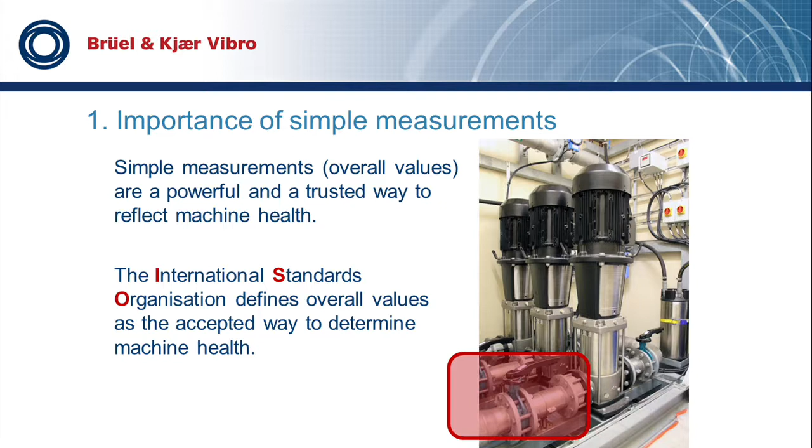However, this machine could have several different failures, like an unbalance of the electrical motor. We could have an unbalance of the pump due to several reasons, like thermal deformation or material caking or something like that. We could have a misalignment between motor and the pump. We could have electrical problems. And all these problems lead to vibrations.

And our overall now combines all the vibrations within a predefined frequency range, whether they are high or they are low, to one value. And this value gives us the possibility to evaluate the condition of the machine. Now, a very good question at this point could be to ask, who defines or who tells me what is a good value or what is a bad value?

And if you don't get any limit values, for example, from a manufacturer of a machine, or if you don't have any own experience in this case, then it is the best way to orient at national or international standards, like the ISO 10816. The ISO 10816 applies for the measurement type absolute bearing vibration and is the relevant measurement type for industrial machines with rolling element bearings.

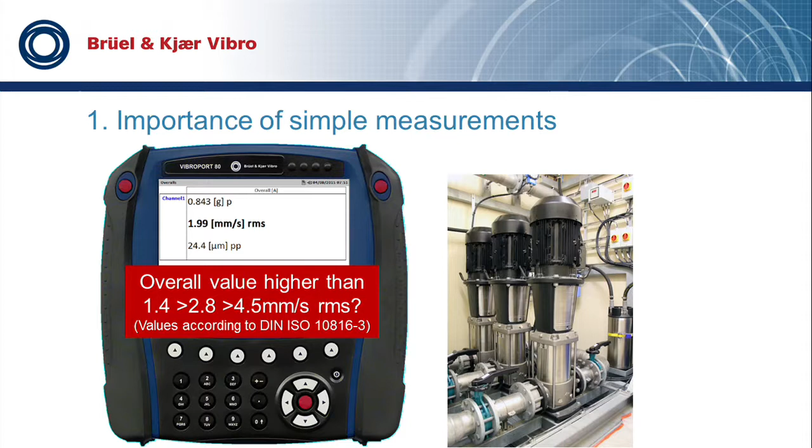We have the ISO 7919, which applies for relative shaft vibration, and that's the relevant measuring type for industrial machines with journal bearings.

Within this ISO 10816, we had so-called assessment zones. We had 4 assessment zones from A to D, and assessment zone A means vibrations for newly installed machines. Assessment zone B means vibrations for machines that can operate without a limit.

The zone C means vibrations for machines who can operate in a limited period of time. When you reach zone C, then you already have a defect at your machine, but it's not so dangerous that you have to stop it immediately. You can operate your machine for a limited period of time. But zone D is for machines where your vibrations are very dangerous and you have to stop your machine and do some maintenance.

We can here see an extract of the ISO 10816, and we see the values recommended from the ISO 10816, and you can see that everything that's below 1.4 millimeters per second is in zone A. Everything that's below 2.8 millimeters per second is in zone B, and so on. And when we compare it to our value, 1.99 millimeters per second, then we can see that according to the ISO 10816, the machine we have measured is in very good condition.

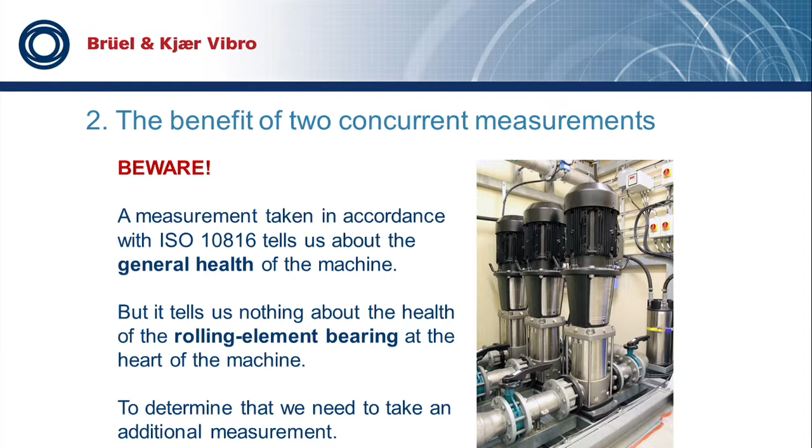However, we have to take care of something. As I told you before, the overall combines all vibration elements of our machine, including a defect bearing. But the problem is that the amplitudes that a defective bearing sends out are very, very low, and they have no influence on our overall. So if we just measure our standard overall according to ISO 10816, then it could be that we believe that our machine is in good condition while our bearing is close to damage. So we have to find another way to have a closer look at the condition of our bearing itself.

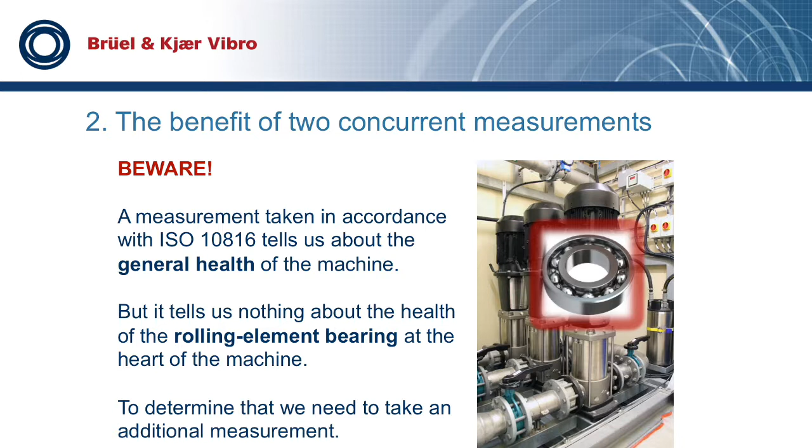We will do a second measurement at the same time with the same sensor, and that's the benefit we get from the VIBROTEST 80 or the VIBROPORT 80, that we are able to do two measurements simultaneously. We will choose path A of the instrument and measure our standard overall according to the ISO 10816, and on path B we choose another overall, a special overall, just to monitor the condition of our rolling element bearing.

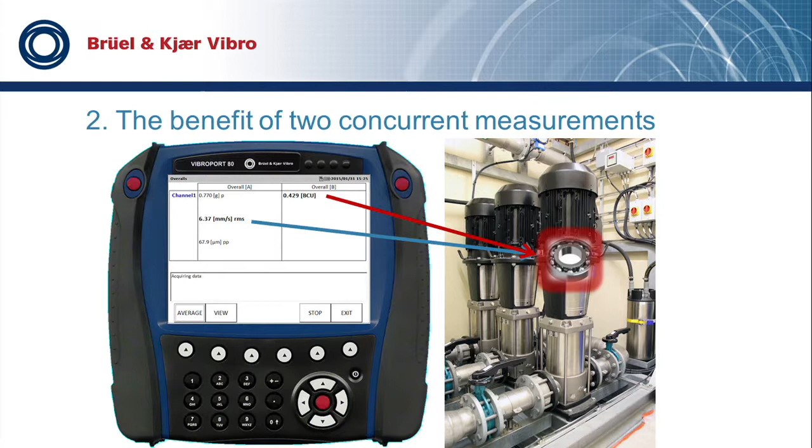Here we have the display of our instrument, and you can see that on the left side we have the overall for the machine, and on the right side we have a special overall just for our rolling element bearing. Here in this slide we can see the difference between both measurements. On the left side we can see the measurement according to ISO 10816, and the ISO 10816 recommends to measure the vibration velocity, the RMS value of the vibration velocity. And the RMS value of the vibration velocity represents the power of the vibration, with which power the machine is vibrating. And we are measuring it in a predefined frequency range from 10 Hz up to 1 kHz.

And we have to beware of something. This is just a recommendation. 10 Hz means that this recommendation applies for machines with a speed greater than 600 cycles per minute. 600 cycles per minute correspond with 10 Hz. So if you have machines rotating slower than 600 cycles per minute, you have to adjust this frequency range. This is very important.

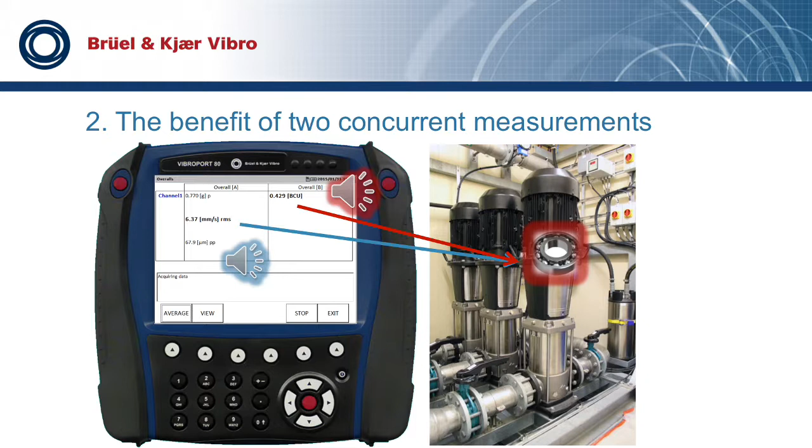The second one should represent the high frequency measurement. Unfortunately, the human ear is not able to hear frequencies above 15 kHz, so we had to do a little signal manipulation to give you the chance to hear what's going on in the bearing. I find this very impressive.

Okay, we will now come to point 3 of our agenda, and I will show you how easy it is to operate the instrument. Let's begin with pushing the start button of the instrument. Modern handheld devices like the VIBROPORT 80 and the VIBROTEST 80 are small little computers, so it always needs a little bit of time for the instrument to boot up.

According to our level concept, we are now on the top level of the VIBROTEST or VIBROPORT 80. You can see we have different kinds of icons here. We have blue icons, and the blue icons represent the measuring modules which are available for the instrument. And they are, in special case, more or less highlighted, and that depends on what measurement module you have bought.

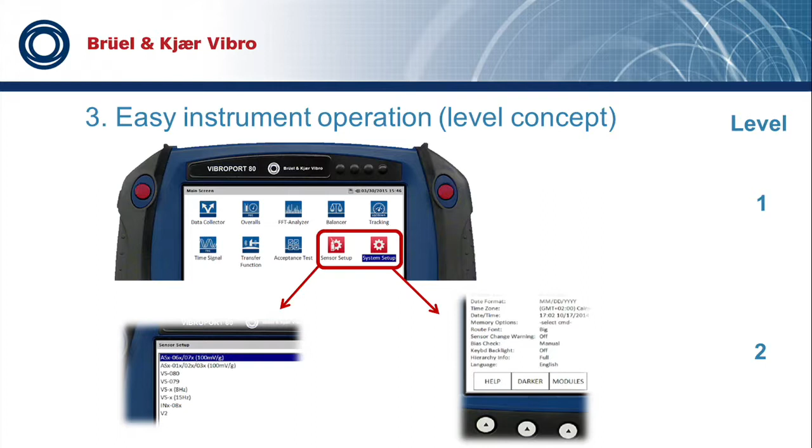We have the red icons, and these icons are special icons to set up the device in an optimal way along to the needs of the user. We had the system setup where we configure general parameters like date and time and several other things. And we have the sensor setup, which contains a library of all possible sensors or transducers which you can use with the instrument. I will explain these two buttons a little bit later.

Here we can see, as I told you before, the measurement modules, and it's possible to navigate with the navigation keys here to these different modules, and we can go into a module by pushing the so-called fire keys. We had 3 red fire keys on the instrument, and they have all the same function. It's just for your convenience which fire key you will use, whether you are a left-hand worker or a right-hand worker. And now we can push the fire key, and then we go into a measuring module.

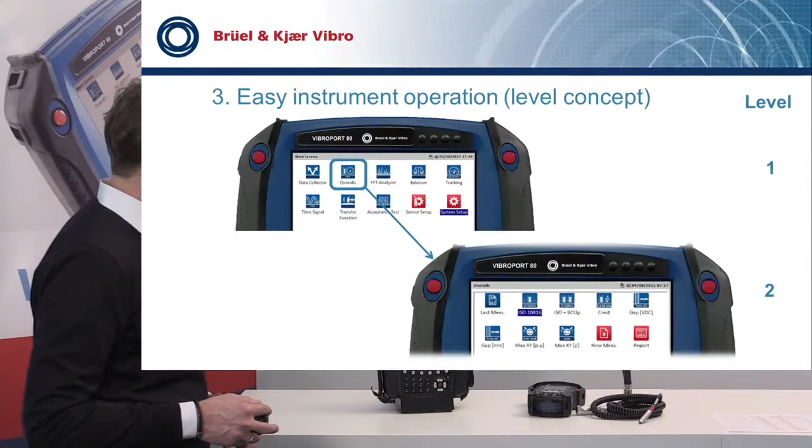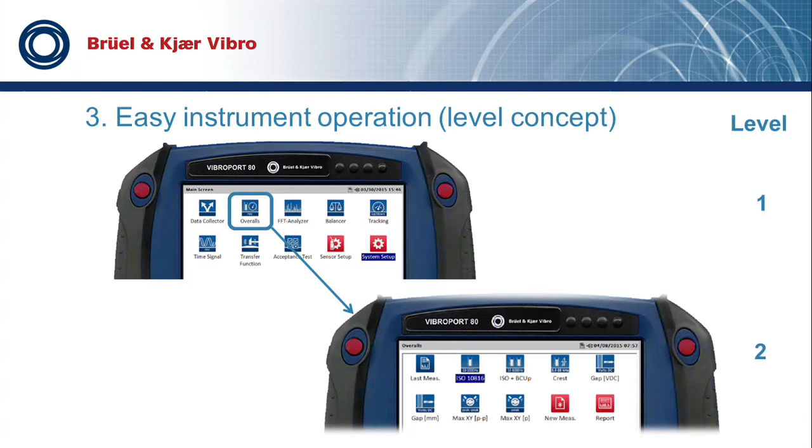And here we also have blue icons and red icons. And the blue icons represent predefined measurements. And you can choose one of these measurements, like a standard measurement according to the ISO 10816, and you can rely on the parameters that are pre-configured. And if you rely on them, you can push the start button and jump automatically into the measurement, and are now able to measure at your machine.

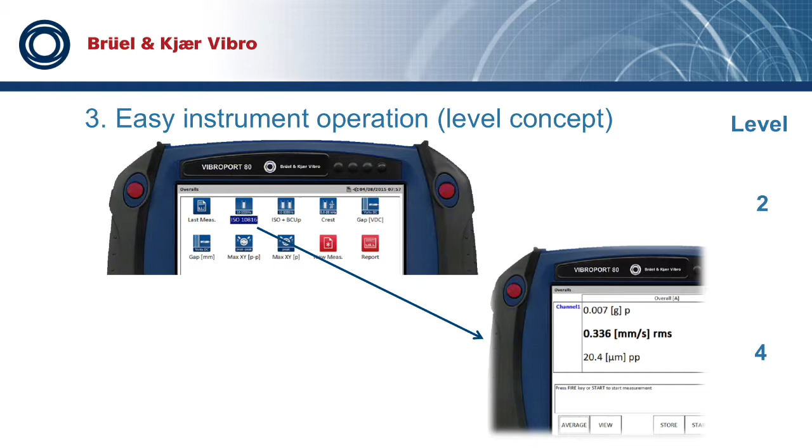But if you want to have a short look at the parameters behind that predefined measurement, you can push the fire key, and you can now have a look at the parameters and could probably change something if you wanted to. We go back. Even in this module we have 2 red buttons. We had a report button where stored measurements could be recalled, and we have the button New Measurement where we can create a new measurement from the beginning.

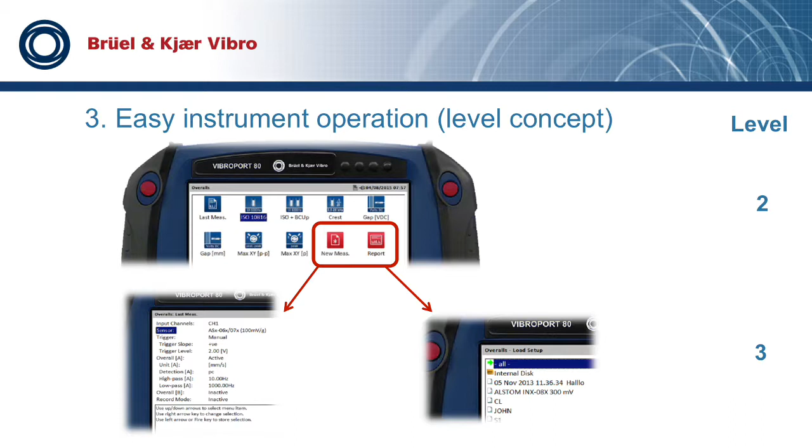According to our agenda, point 4, we will now do a live demonstration of all the things that I've told you now theoretically. For that we will do a little break and do a little rearrangement for you.

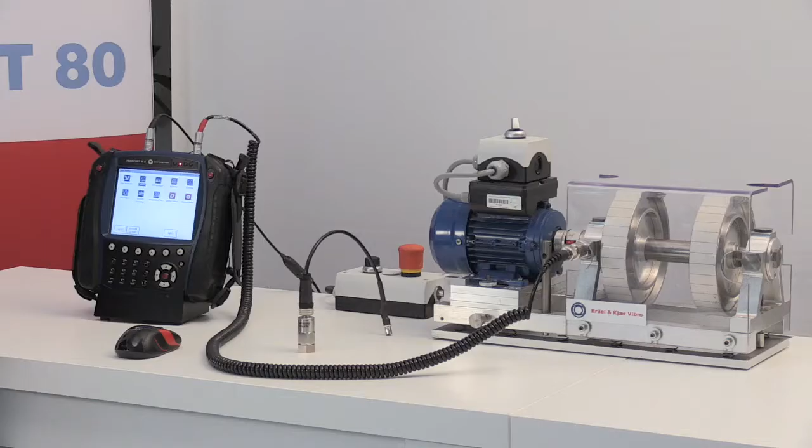Yeah, hello again. We will now come to the live demonstration, and for that we will go back from our industrial machine, our vertical pump set, and turn to a small little demonstration motor with 2 flywheels. And I will show you the measurements, the operation of the device at this small little motor. And it's necessary to explain something to you.

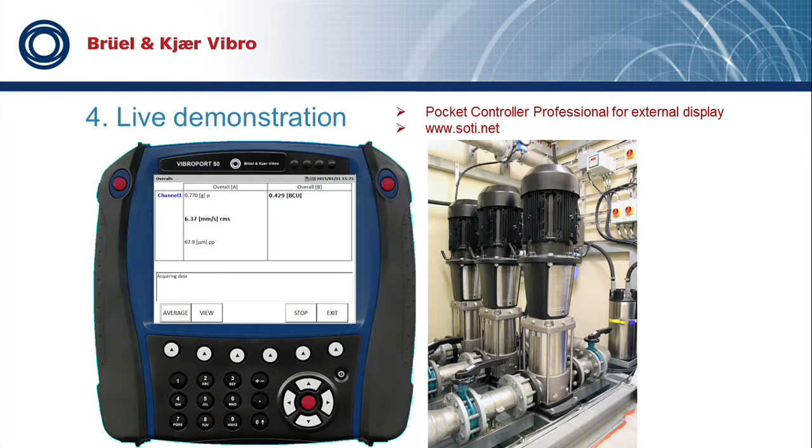I need a third-party software so I can show the display, the screen of my instrument to you. As I told you, it's a third-party software. It's called Pocket Controller Professional, and you can download it from the internet under www.soti.net. It doesn't cost much. I think it's less than $50. And this software enables you to project an image of your device on a computer screen.

And this could be very helpful, for example, for training sessions like we do here, or for the operation of the instrument via the internet. So it's possible that someone is sitting in an office, maybe in Germany, and the device is in China at a machine, and you can operate the device from your office in Germany via the internet. It's a very useful tool, I think. You connect your device with the computer, and then you can see the screen of our VIBROPORT 80 on your computer screen.

We want to talk about the overall module of this instrument, and we navigate with the navigation keys to our overall module, and we press the fire key. Then we enter this module. It also takes a little bit of time. And here we can see that we have blue icons once again, and we have red icons.

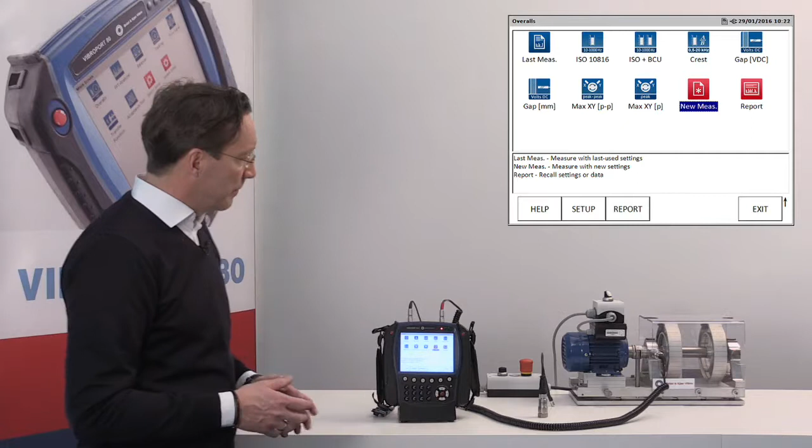The first red button is a new measurement. We will do a new measurement later, and I will show you all the parameters within this button. What's really helpful is that we have, as you can see here, predefined measurements. These are standard measurements within vibration measurement, and we have predefined the parameters within these measurements.

It's for people who aren't so familiar with these measurements, or who don't work with them every day. So they can come back to these predefined measurements, and they are sure that they do a meaningful measurement at this time.

But before we do a measurement, we will go back to the first level and explain to you the system setup. The system setup is necessary at that point when you get a new device or new instrument. Then you have to do the configuration. It's similar to a computer. When you get a new computer, you have to configure it. And it's the same here.

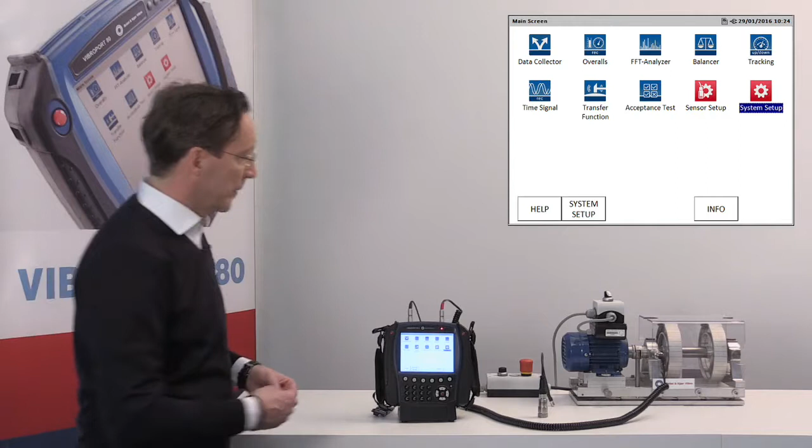I will press the fire key and go into this module, and we'll have a look at all the different parameters. First of all, we have the memory. We have an internal memory with approximately, I think, 50 megabyte capacity. So I always recommend my customers only to use the card. So we choose the card.

The next parameter is timeout. Here we can predefine a period of time after which the instrument automatically shuts down. So if you're not working for 10 or 15 minutes and the instrument realizes it, then it shuts down to save battery. I, for myself, don't like the timeout function, so I always put it on off.

Then we go to the units. In some countries we have the imperial units, for example in England or maybe in America, I'm not quite sure, but we're here in Germany, so we are using the metric system.

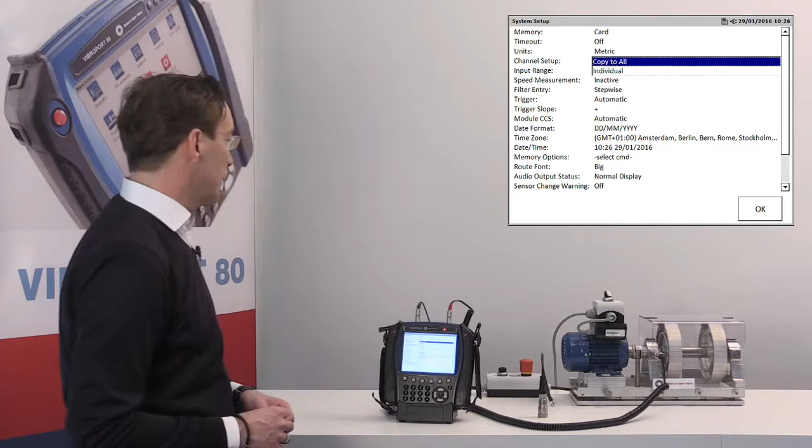We're coming to the channel setup. The channel setup has the possibility to choose copy to all. This is quite helpful when you are working with 2 or more sensors. Then you only have to configure one channel and the instrument copies it to all the other channels. So you don't have to configure each single sensor by yourself.

But there are applications where it's perhaps useful to do an individual configuration. For example, when you use low-cost sensors with outlying sensitivities, then to make sure you do a meaningful measurement, it's absolutely important to configure each sensor by itself. Then you have a look at the calibration sheet and you get the sensitivity of each sensor, and then you are able to configure each sensor separately. But we put it on copy to all; that makes life easier for us.

Input range. We have the possibility of auto range, maximum, and sensor units. And most of the time we don't know anything about the range of the incoming signal. So it's always the best way to choose automatically. Then you're on the safe side. There could be applications like tool spindles, where you have very, very low amplitudes in a very small range. Then you could use the sensor units and give them a fixed range by yourself. But most of the time we use auto range.

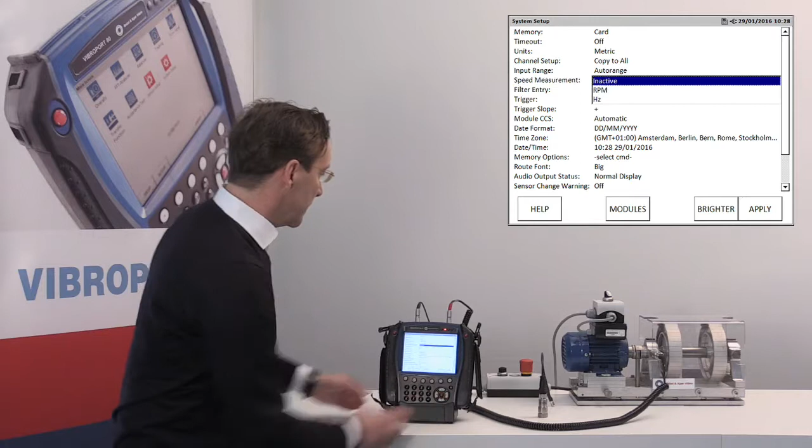Then we're coming to the speed measurement. It's possible to enable a speed measurement or disable it. For most of the measurement modules like the overall or the spectrum, it's not necessary to measure a speed. The problem is, if you enable the speed measurement, then the device wants to have a speed. You have to fix a speed sensor, you have to fix a reflection mark. Otherwise, if the instrument doesn't get a speed signal, it will do nothing.

So bear this in mind. If you are on site doing a measurement and you only see stars on your display, then it could be that you enabled the speed measurement but didn't give it a speed signal. So for our application today, we don't need a speed measurement, and for that we set it inactive.

Filter entry, we can choose between stepwise and free. Here I recommend always to use stepwise. That means that in measuring modules where you can choose the frequency range, you get the most popular frequency bands, and you can choose from these bands. Free would mean that you can define your own frequency range by hand, saying, okay, I want to measure from 7 Hertz to 389 Hertz. But in 15 years in my vibration life here at Brüel & Kjær Vibro, I've never met someone doing that. So we leave it on stepwise.

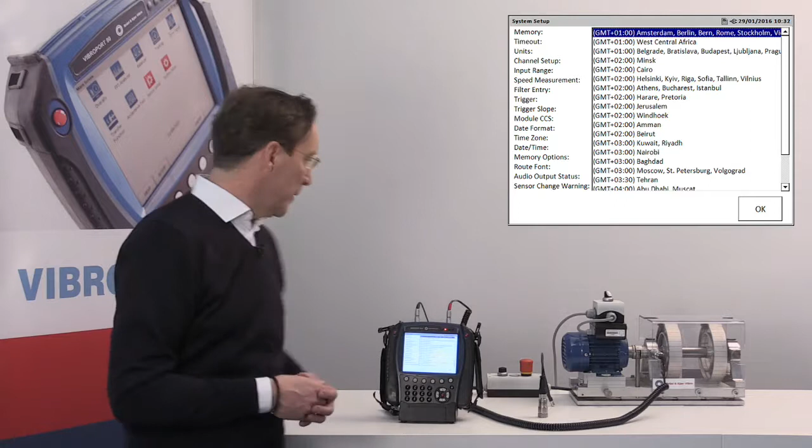We have a date. Coming to the date, we have different formats for the date. We're here in Germany and we appreciate to have day and month and year. So I choose day and month and year. We can choose a time zone. We can tell the device I'm now in America or in China or in Europe. We're in Germany today, so I choose as time zone Berlin.

And then we go to date and time, and here is the mask where we can set the actual date and the time. We can change it, so when we store measurements, we always have the right time and the right date for that. Oops, that's wrong. We are having 10. Okay. Everything's all right.

The next parameters, memory options, route font, and sensor change warning are related to route-based data collection, and they are not relevant in this training session, so we'll explain them in another training course.

Last thing is language. We have the most popular languages around the world. We're here in Germany, so I have to talk in English. No, I would even prefer to talk in German, but then most of our customers couldn't understand me, so I try to go along with English.

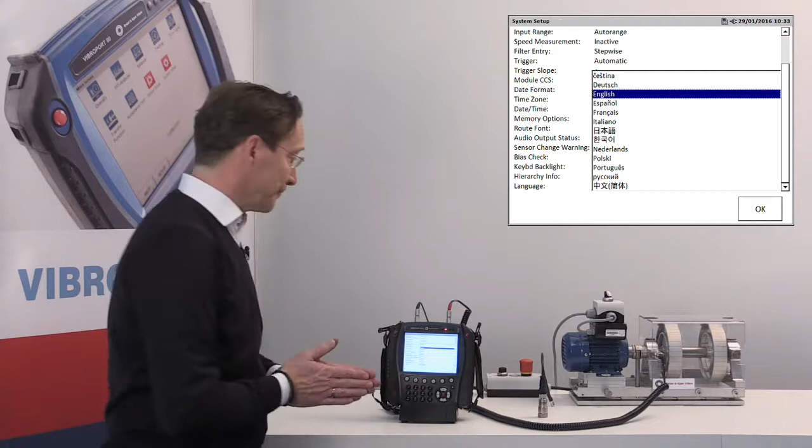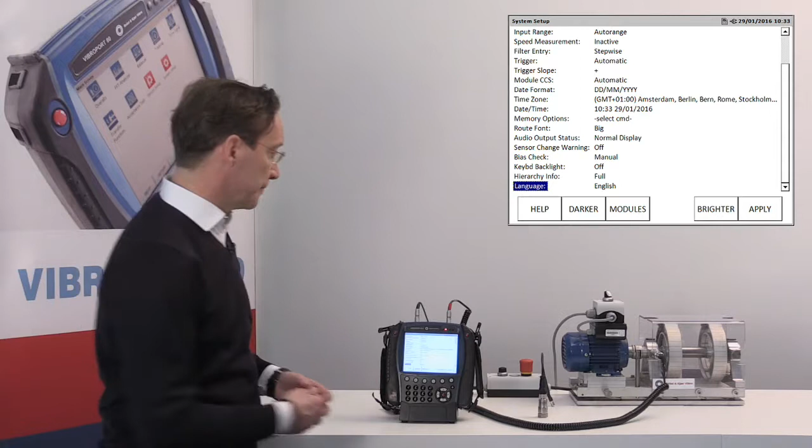So, that's it for the system setup. We configure now all the parameters, and normally we don't have to go into the system setup every day. We do this once, and then it applies for all the modules we use. Okay, we press the apply button, and now everything is fixed.

Let's have a short look at the sensor setup. As I already told you, we have a library of the sensors from Brüel & Kjær Vibro, which we can use with this VIBROPORT 80. I press the fire key and go into this module. And here you can see that we have the classic standard sensors from our program.

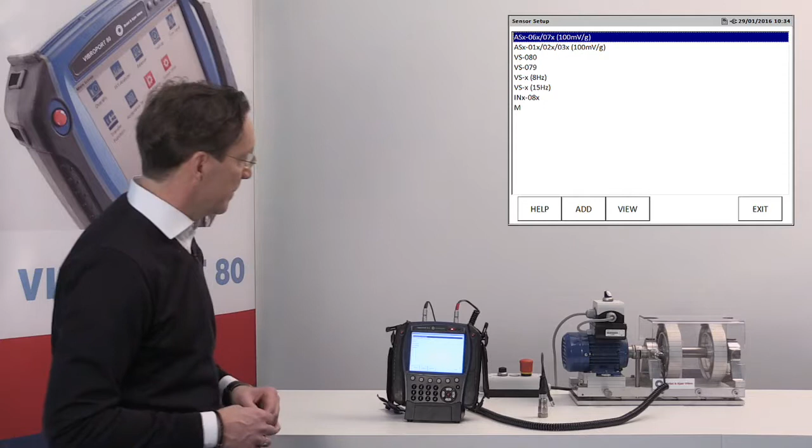As you perhaps already know, we have 3 types of measurements within vibration measurement. We have the vibration velocity, we have the vibration acceleration, and we have the displacement. And here we have the relevant sensors for these measurement types. AS always stands for acceleration sensors, VS stands for velocity, and the INx is a displacement sensor, so you can measure displacement when necessary. But it's very easy to add a new sensor if you would like to.

It could be that you want to use a third-party sensor, or you are a service technician, you come to a machine where you find a fixed installed safety system. Fixed installed safety systems sometimes have so-called buffered outputs, and at these buffered outputs you can tap the original sensor signal and can use it for your device. That's quite powerful. And for that you have to know the technical data of the sensor installed. And I will show you now how easy it is to add a new sensor.

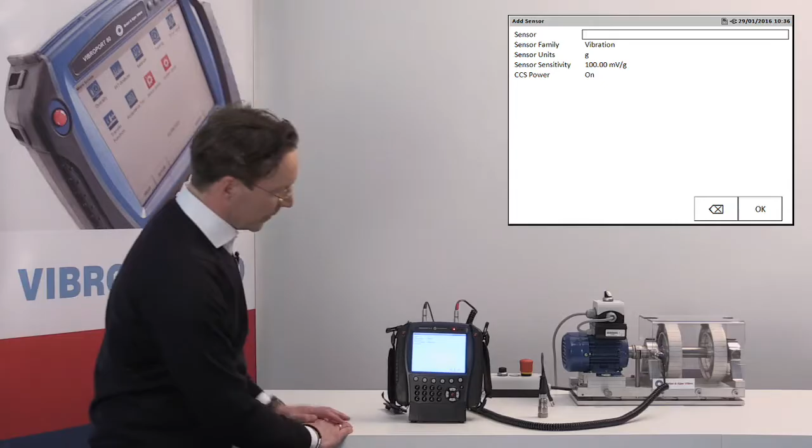We can here press the Add button. We have here the function keys. We press the Add button, and now it gives us this mask. And we have here sensor. We can give the sensor a name. We can have a look at the sensor, how it's called. We can give it just a name as we want. And I will give it the name, perhaps, H. Okay.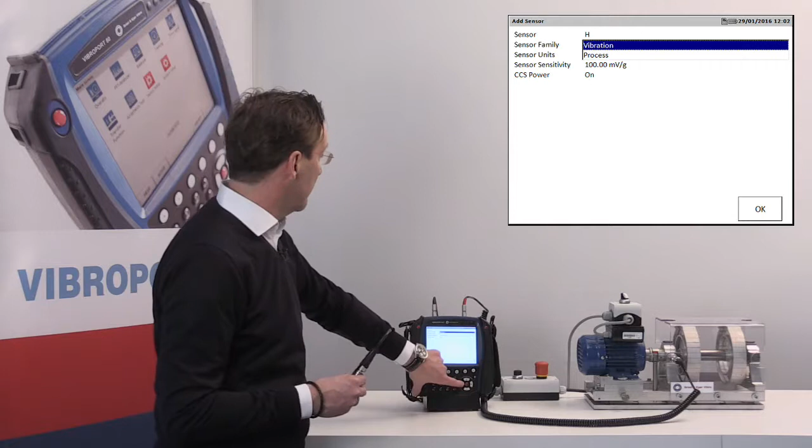What kind of sensor family do we have? It is a vibration sensor. It's also possible to enter process sensors like temperature or pressure or something like that. But we have a vibration sensor. We have a look at the unit, the sensor unit. We go into it, and we see that we have all the units known already. We have vibration acceleration, we have velocity, and we have displacement, and so we have the relevant units for that. This is an acceleration sensor, so we choose the unit G.

To enter the sensitivity, it's necessary to have a look at the data sheet. You can look at the data sheet with the technical information for the sensor, and there you can see the sensitivity of the sensor. And this is a sensor with a sensitivity of 99.8 millivolt per G. And we enter 99.8.

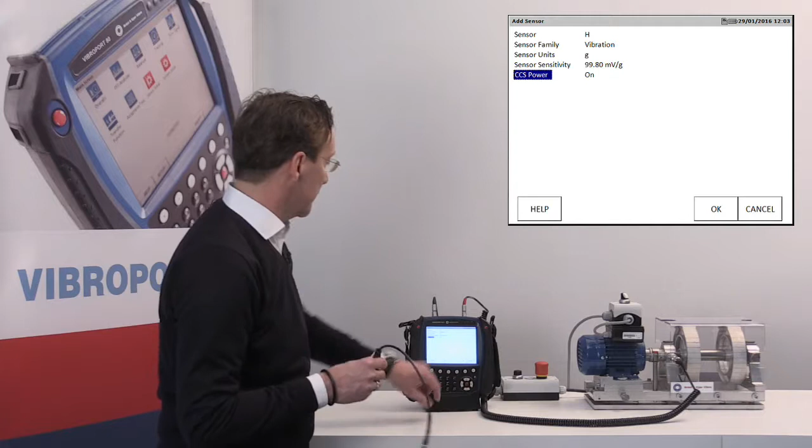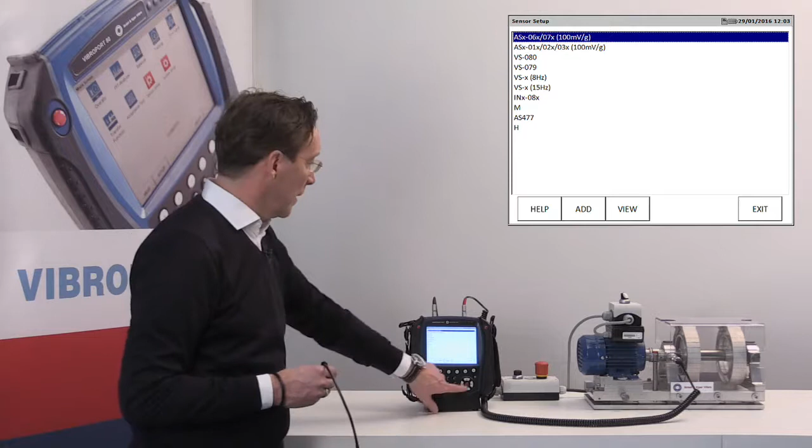And this is a special sensor which needs a power supply, a constant current power supply. So we had to put it on here. Okay, so everything's correct. We can press OK. And now this new sensor is part of our library, and we can use it for measurements in the future. We press exit, and we are now ready with what my colleague once called the housekeeping of our device.

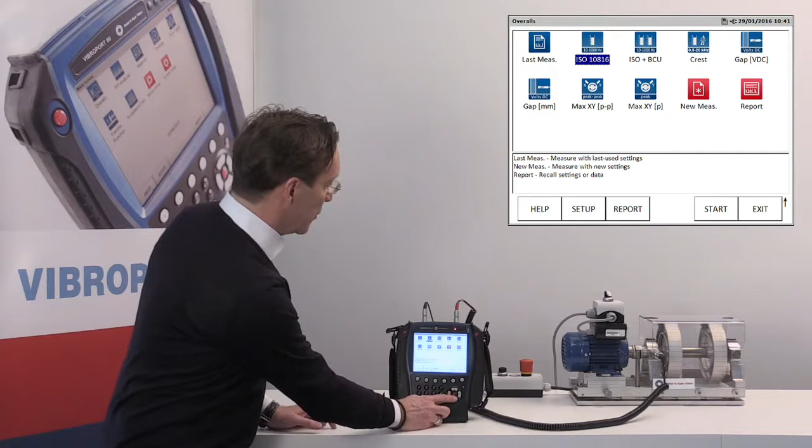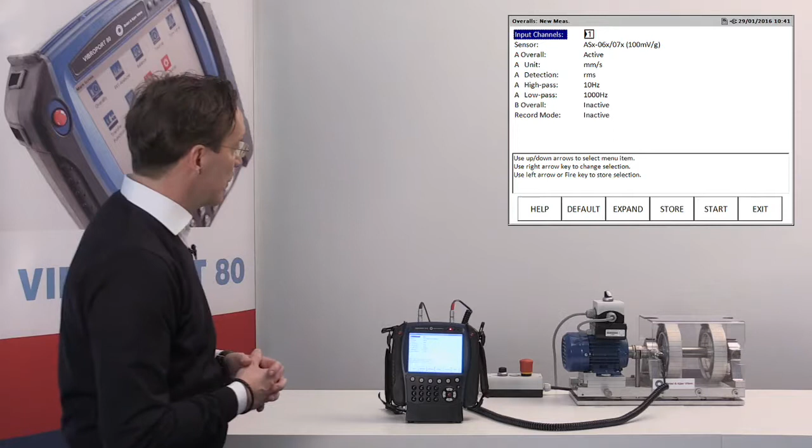Okay, let's come to the next point. We will now do a live demonstration of the module overalls. I navigate to the overall and press the fire key, and we want to do a completely new measurement from the start. So I choose the button New Measurement and press the fire key. Here are now all parameters we have to configure. First of all, we have the input channels. We can measure with 1, 2, 3, or 4 channels. It depends on the application. Most of the time it's enough to measure with 1 channel.

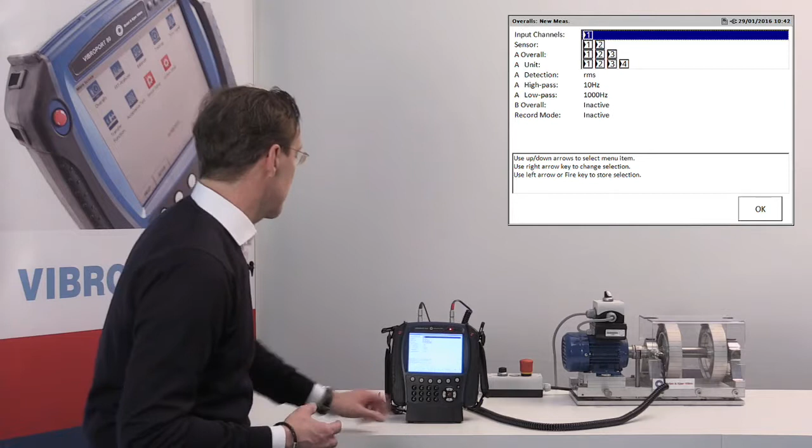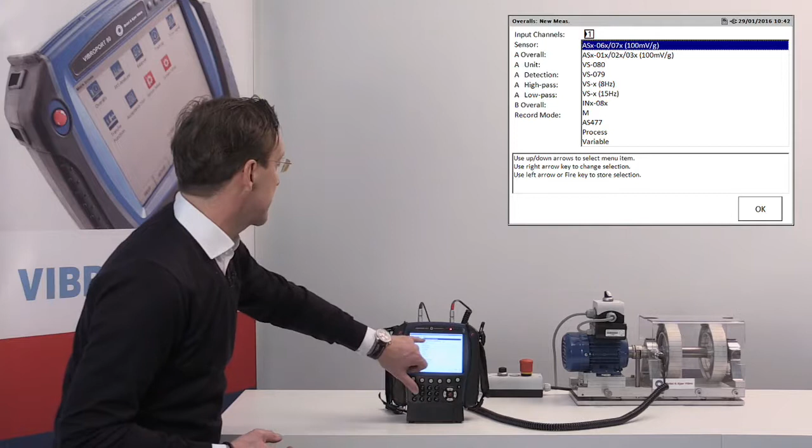Then we choose a sensor. Here we can see all the sensors which are available in this instrument. We are measuring with a standard sensor, an AS063. So I select this one, an AS06X. We have a family of sensors with AS6, so we have the X there to put them all in one family. We will set the path A on active. That's necessary, otherwise we couldn't measure. The unit is millimeter per second. We are measuring the vibration velocity in accordance to the ISO 10816.

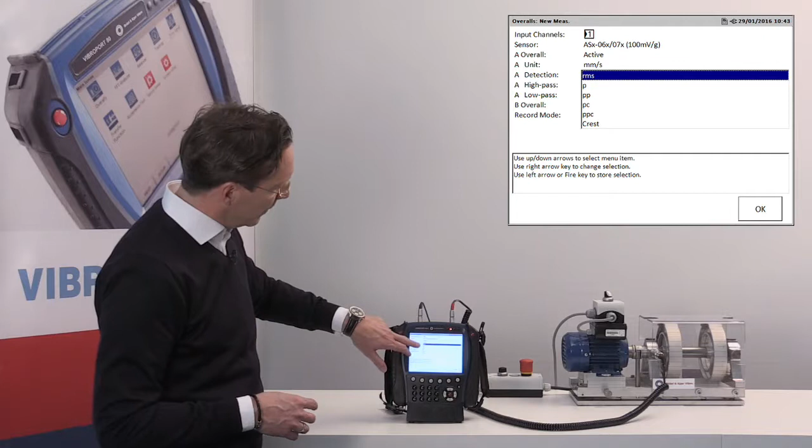And the detection is the RMS value. We have other detections like peak or peak to peak. This is a true peak or a true peak to peak. We could also detect the value with peak calculated. When choosing this, that means that we are measuring an RMS value and multiply it with √2. And when we choose peak to peak calculated, we are measuring an RMS value and multiply it with 2 times √2.

So please bear in mind that there are a lot of different things that you could select, and it's always absolutely important to bear this in mind, because when you try to compare measurements to each other, if you have a colleague or a customer who says, I've done a measurement on site and I have this value, and you do a measurement on site and you have a different value, then please compare the measurements and have a look at all these parameters if they are completely the same. So if there's something different here in this area, that could lead to problems and could lead to differences within the value.

Another interesting detection is the crest factor. The crest factor is a very easy and simple measurement for the early detection of bearing damages. You need one sensor, you choose crest factor. And what does the instrument do? The instrument measures the RMS value of the acceleration and the peak value of the acceleration, and it calculates the ratio of both. And you get a value, and if this value lies between 2.6 or 3.6, then you can be sure that your rolling element bearing is in very good condition. So it's a very easy measurement for you.

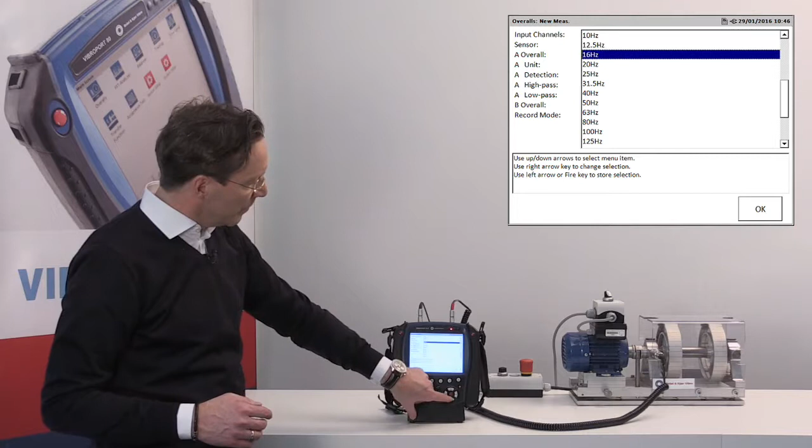Okay, we choose the RMS value, and now we're coming to the high pass. And now you can see what I've explained a little bit before. Here we can see the stepwise bands. We have several bands that we can choose, the most popular ones, and we choose 10 Hertz for the high pass. So everything below 10 Hertz we don't measure, and the low pass is at 1000 Hertz. So everything above 1000 Hertz we don't measure.

Okay, it's possible to choose the second path. We can put it on active, and now we have a second parameter list, like the parameter list for channel A, and we can here configure a second measurement. As I told you once before, with a normal standard overall, we can't see a damaged bearing, so we choose here as a unit our BCU value, so we can have a close look at our bearing and monitor with the second path the condition of it.

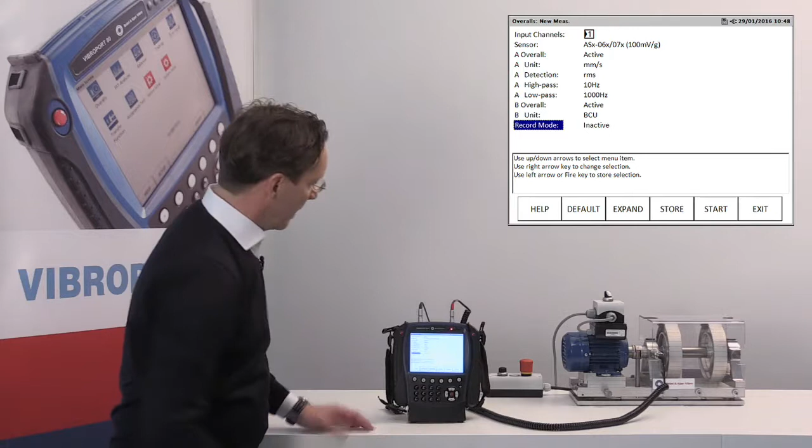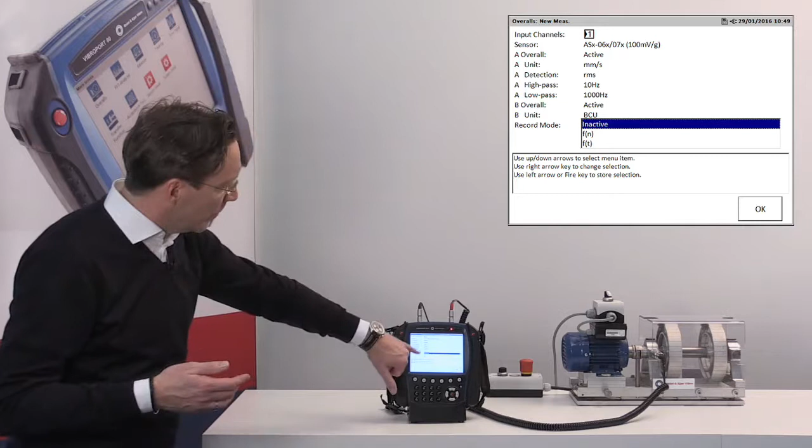Here's one other thing. We can activate a so-called record mode, where we can measure overalls versus time or versus speed. That could be very useful to have a look if the behavior of your machine changes within a defined speed range, or if the behavior of your machine changes due to other things like temperature. Temperature is a good example. If you have a fan which is transporting high temperature air, then it could lead to thermal deformation on your blades or something like that, and that could change your behavior. And with this module, it's possible to say, okay, I want to measure my machine for an hour or 2 hours and have a look if the behavior changes in this period of time.

Or you say, okay, I have a machine which has a speed range from 500 cycles per minute up to 1,500 cycles per minute, and you want to have a look if there's something in this speed range that has an influence perhaps on your behavior. It could possibly be that you have a resonance place in this speed range, and with this record mode it's possible to detect such effects. But we will leave it inactive and are now ready to do a measurement.

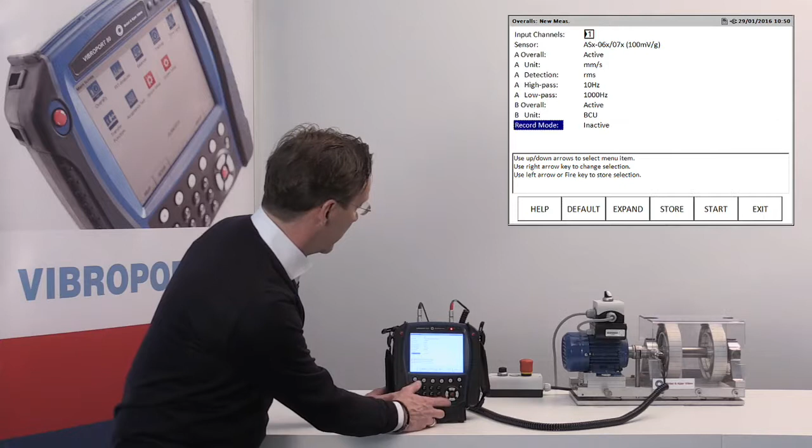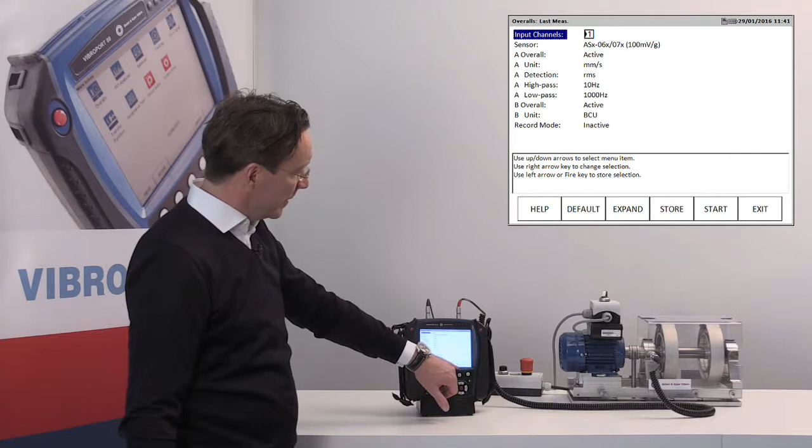First of all, let me start the engine. And now we can press either the start button or fire key. I will press the fire key and start the measurement. We have some LED lights here on the instrument showing what the instrument is doing, if everything's correct, if we perhaps have a failure with a cable or something like that. But the green light shows us that everything's correct.

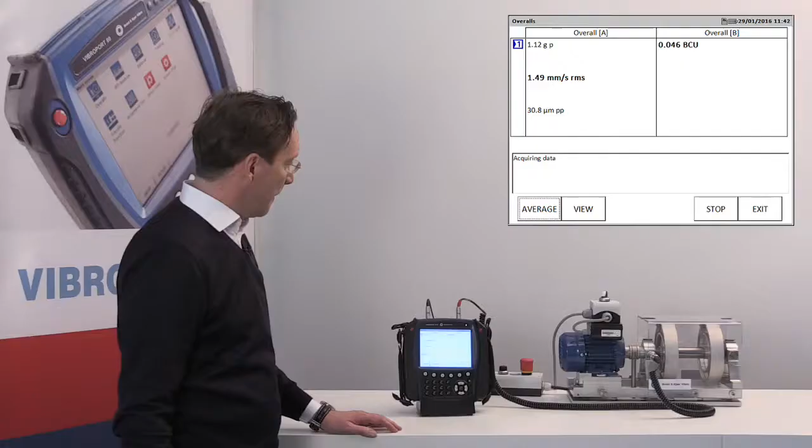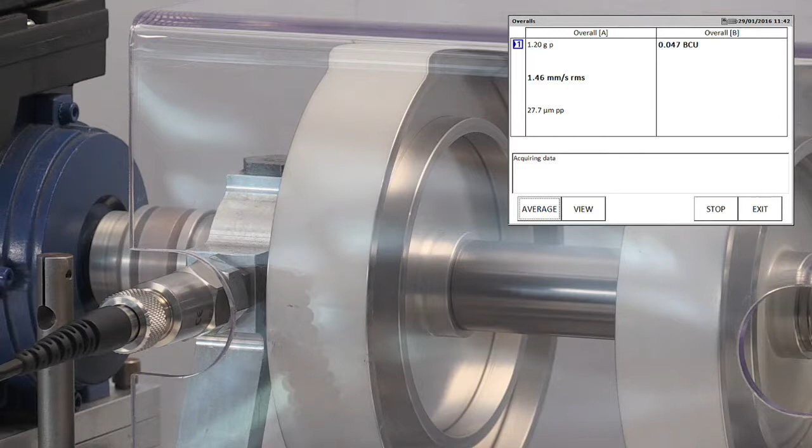Here we can see the relevant value, the overall vibration velocity in millimeters per second RMS. The value is 1.45 millimeters per second. That's a very good value. And our BCU value, looking in detail on our bearing, is 0.04, so it's quite nothing.

If the values are varying, then that could be due to several aspects. For example, traffic in the near surrounding or a machine standing beside our machine. Then it's possible to press the average button, and then we get a stable value. So everything's correct, and we can press the stop button.

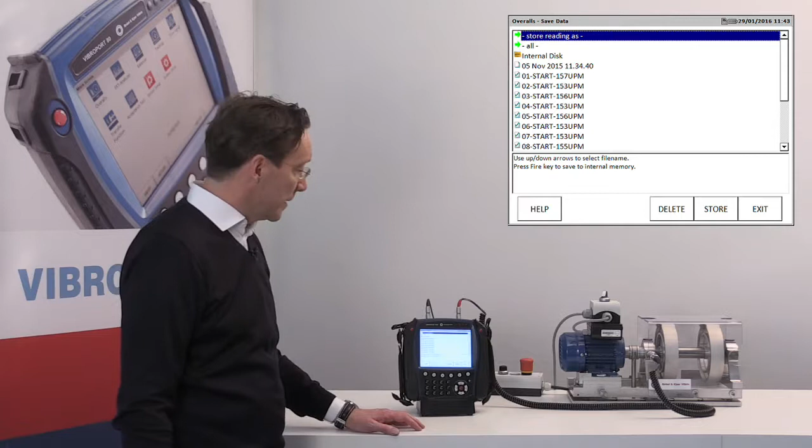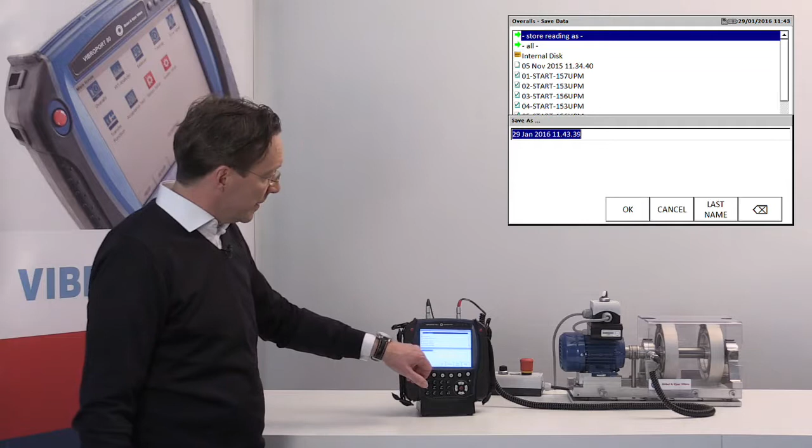We can store this measurement by pressing the store button, and now we can choose if we want to store it in the internal storage or on the card. We recommend always to store it on the card. And for that we have to press the store button once again, and the instrument gives us a suggestion for a report name and gives us the date and the time. But we will choose another name.

In this case we say, okay, this is the drive end of the machine and it's the horizontal direction, so we called it DE and HOR. So I know that we are measuring in the horizontal direction. You should use terms and names within your company that you are familiar with, something like a language within your company. So everybody knows when you are talking of DE horizontal where you are.

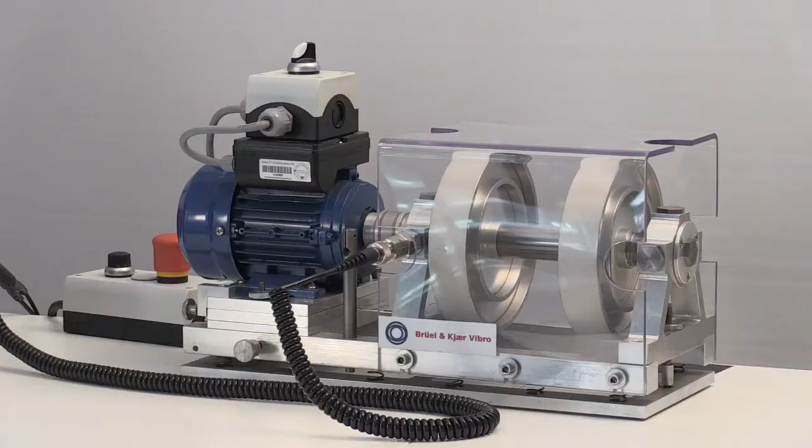I have a customer who uses just numbers, saying this is my first measuring point, this is the second one, the third, the fourth. But he's measuring always in the same way. So when he says we have high vibrations on point 4, everybody knows where point number 4 is. Okay, we do another measurement

and we move the sensor to the vertical direction. Now we have to go to the button, last measurement. We don't have to do another configuration. We just choose last measurement, and with that we guarantee that the parameters we use for the next measurement are exactly the same as in the first one. So the measurements are comparable to each other. And now we have to press the start button.

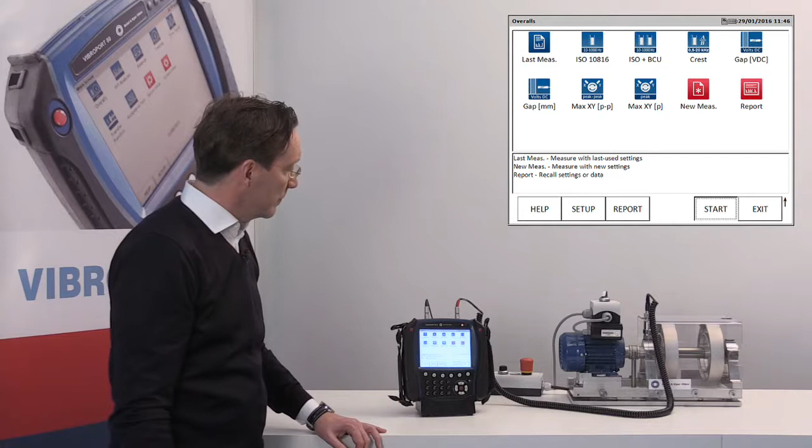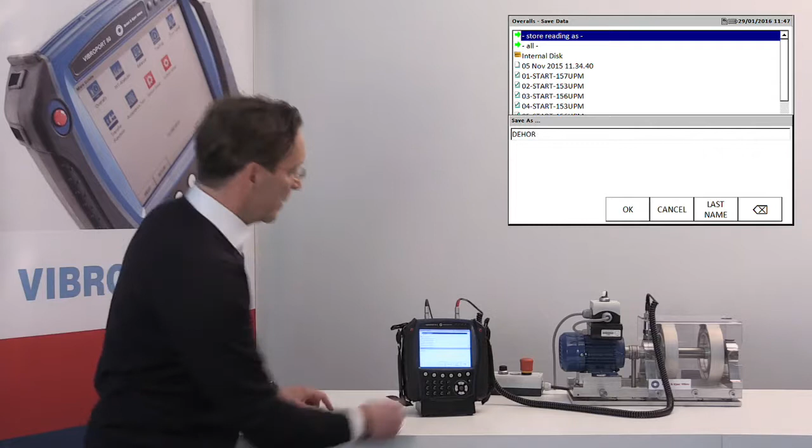The values here are also very low. We press stop, and now we can store this. Once again, store. And now it gives us the possibility to choose last name, and when I press the button last name, it gives us the last name, which was DE HOR, and now we are measuring in vertical direction, so we change this to DE

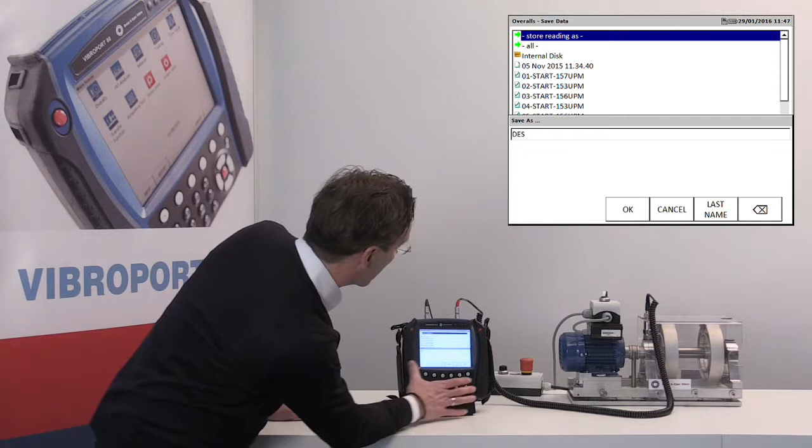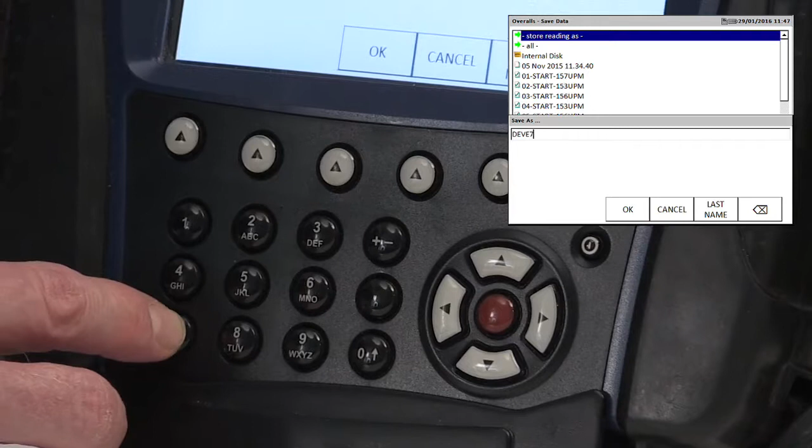It could be useful to know the alphabet. And DE vertical, and so it's very easy for me to choose the second name. I press OK. Yeah, so now we have done 2 measurements at our measurement point. We stored the data for future analysis or documentation or whatever.

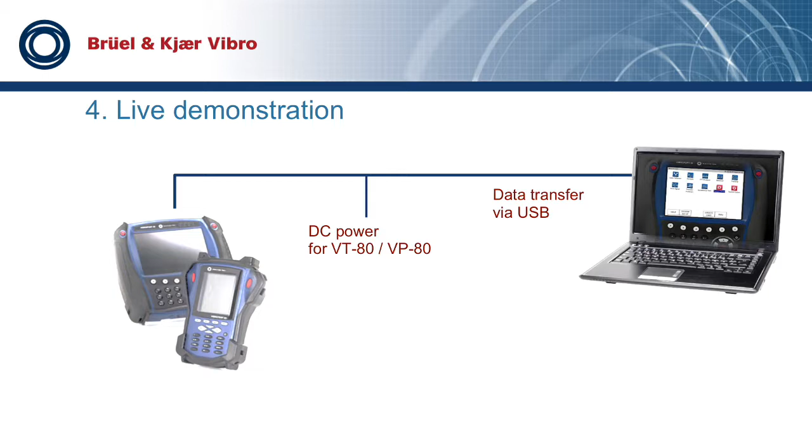And now it's possible to send the data to a software we deliver with this instrument. It's called the REX software. For that we have to connect the instrument with our computer. We need a third-party program for that. It's a Windows program called the Windows Mobile Device Center. You can download it for free from the internet. It's quite easy to do.

And then the instrument communicates with the software, and it's very easy to download all the stored data from the instrument into the software. There you can have a look at it and embed them into a report for customers or something like that. It's also possible to unplug the storage card from the device and put it directly into the computer. That would be the second way to do this, but for myself, I always connect the device directly with the computer and connect it to the software.